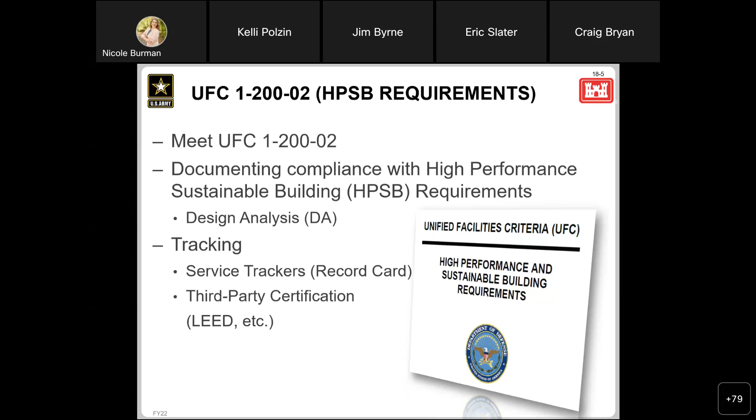So diving into the tracking process here in the UFC, it calls out the high performance sustainable building checklist to find the one that's appropriate for your project. You need to go to the whole building design guide, and that has those tracking requirements and reporting pieces.

So when we're diving in here, what we have highlighted right here is for the Army underneath the USACE sustainability tracking. Then there's the NAVFAC and the Air Force below that. What we're showing here is that energy and sustainability record card.

So that is all one and the same, to just make that clear. The high performance sustainable building checklist is the same as that E and S record card if you see those written in different places. So that's the intent.

Okay, so in reporting, best practice is to make sure that not only is the delivery team completing these checklists, from the very beginning, right, we're supposed to have these at charrette reports and so forth. So every deliverable, you would have this checklist. But also, best practice is to make sure your district sustainability POC is aware and receiving that same checklist to help with any lessons learned and upward reporting.

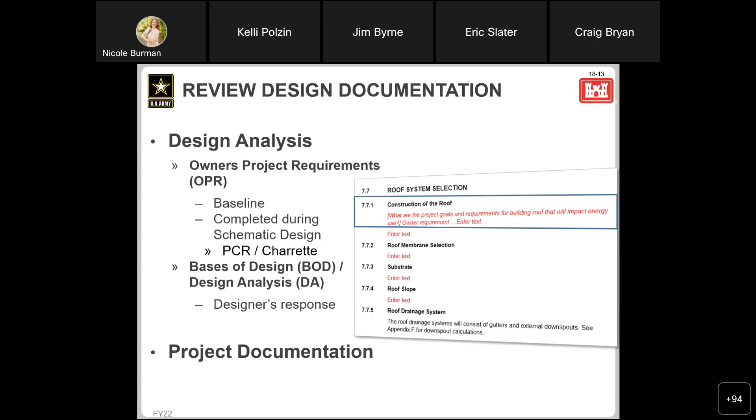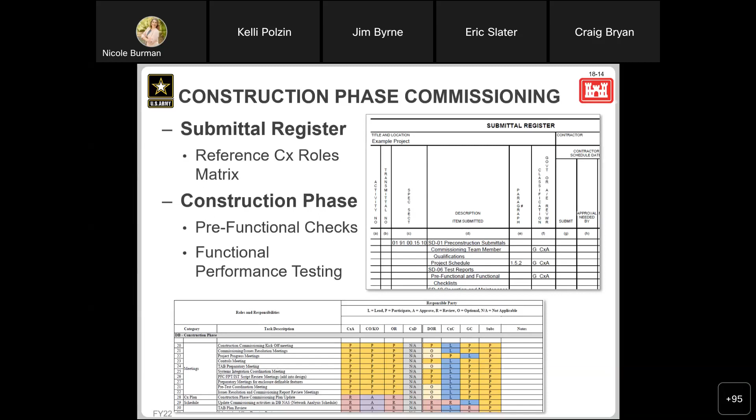All right, we're going to go ahead and move into third-party certification. So I'm going to be doing an overview of third-party certification and kind of where that lands and what that process looks like. And then we are going to touch on several pieces of credits, all tied back to the UFC specifically. But depending on time, we may not be able to touch on them for very long. Most of them have already been covered in other webinars, but we're talking about documentation here, so we have some information to provide for sure.

Okay, so diving into third-party certification, really it has a significant role in reducing energy and water, the taxpayers' money, contributions to national security, keeping indoor environmental quality going. It has been studied and shown that having somebody review—an outside entity, a third party—reviewing our high-performance buildings has saved taxpayer money in that sense, because before we had verification teams that had to verify some of this, and think of how many levels of employees that would be sitting in a room looking at all these pieces.

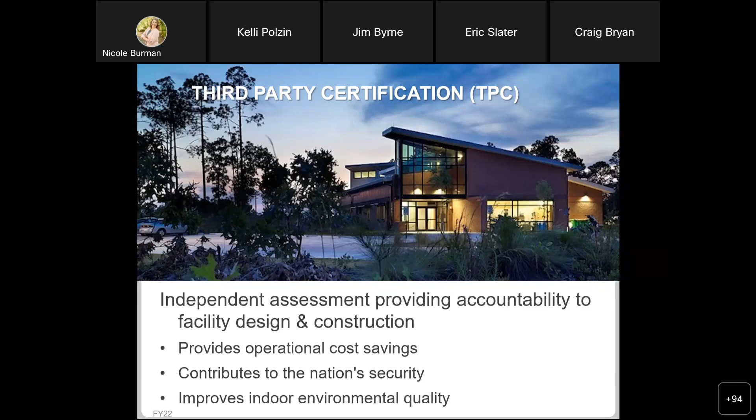So let's look at the options. Some of these are available to other services, and we've got two main third-party entities that work this: the Green Building Initiative, GBI, known for Green Globes, which also covers guiding principle compliance. If your agency is like Air Force, they would be one of your options for guiding principle compliance. Then we've got GBCI, the Green Business Certification Inc..

They are the lead, right? USGBC—their terminology really gets all flipped around when we talk about it, but this is a good visual to show where that breakdown is and how it moves into the language that's out there. So LEED is USGBC, and they're underneath that GBCI umbrella.

They also do a version of the guiding principles. So when we're talking about Army, we're looking at LEED. When we're talking about Air Force—and NAVFAC actually allows a lot more—but for the guiding principles, you have two options there.

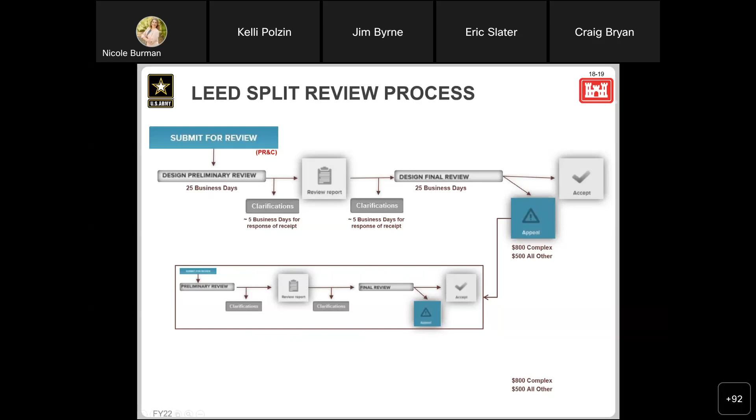In general, we want to remember that some forms have linked information, or that information will be verified by the reviewers, and they will send clarifications or request changes and adjustments if they don't match for some reason. So we want to make sure things like your numbers of employees — your FTEs or visitors, the male and female ratios, your LEED boundary, and so forth, which we'll talk about later — all of that should be matching throughout the project.

The blue fields in the form are fillable. Forms do expand, so when you first look at it, it may look really simple, but once you start picking your options it'll expand into what data you need to provide, and so forth.

LEED updates their supporting documentation, so you want to make sure that when you're starting that documentation, you're pulling down the most recent information — spreadsheets and so forth — from the credit library online.

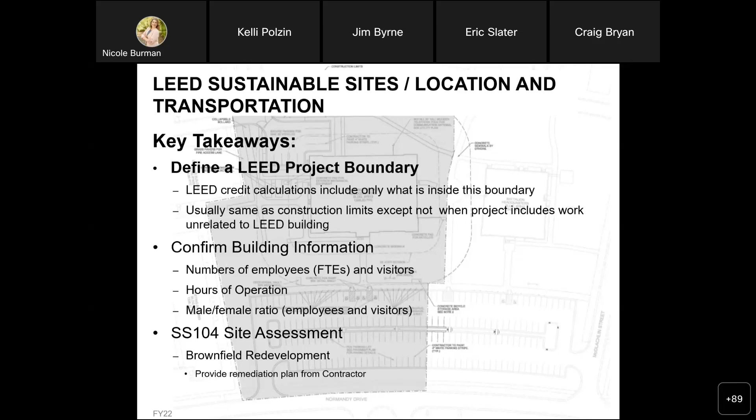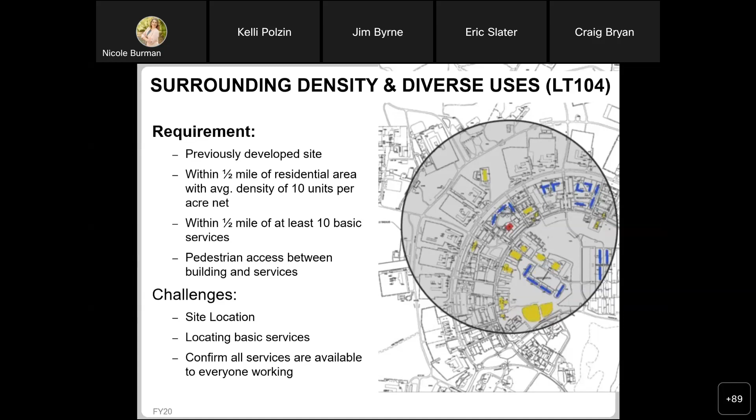Okay, so that hits our mark of all the things that haven't really been touched on in their webinars. Now we're moving into all the other key takeaways, key pieces that are related to our UFC.

Diving into water efficiency, this is bolded: calculate early. You want to make sure you have that male and female ratio waiver ready to go or already uploaded into your credits, waiting for that day to submit, but also work on this. This is something that can be done very early - it's a quick calculation. Once you understand a little bit about your project, you can confirm how close or how potentially not close you are, depending on what that mission is accomplishing for your water efficiency. This is related to that water efficiency product, and here's the EPA's WaterSense to reference and look at there.

Did have another question in the chat: what level of documentation is needed for projects that are not subject to third-party certification? Example being renovations that are less than 50% of replacement costs, where just a component of the building is being replaced - do we just fill out the high performance sustainable building tracking sheet?

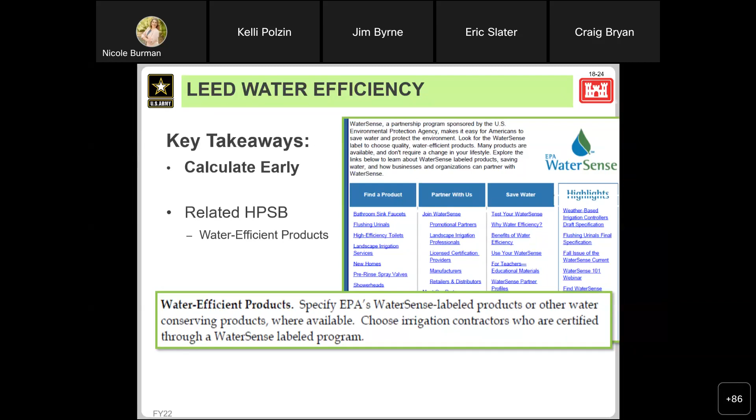Okay, so more water elements here. There's opportunities, there's always opportunities for innovative technology. Just trying to see when that's an appropriate time to pursue that and work that. If you've been around for a little while, you know the story about waterless urinals. That was not popular, and so Army no longer requires waterless urinals. So that may not be your best approach for the innovative wastewater technologies, but there's other ones that should be discussed and thought about when you're looking for opportunities here on your project.

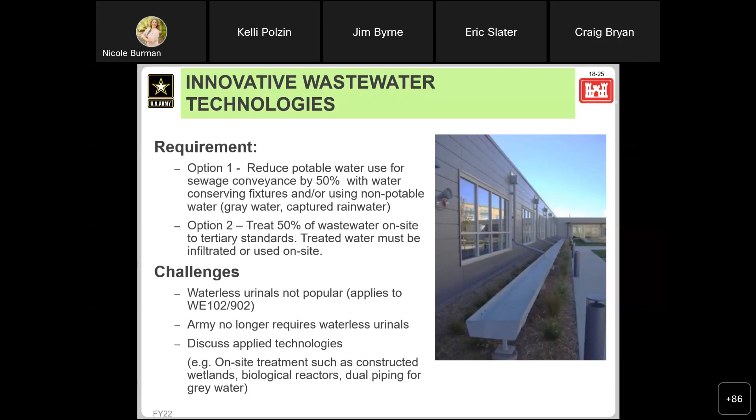In the water use reduction, this is the one where I'm talking about that calculation. You can dive into that pretty quickly. Of course, this is where that waiver gender ratio comes into play and will have to be uploaded. You can find that on the Whole Building Design Guide website. And then this is where you also can consider or understand what's not considered and what's included in that calculation. Sometimes we have confusion on which things would be a part of that and potentially make assumptions without doing those calculations and ruling a credit out prior to it actually being achieved.

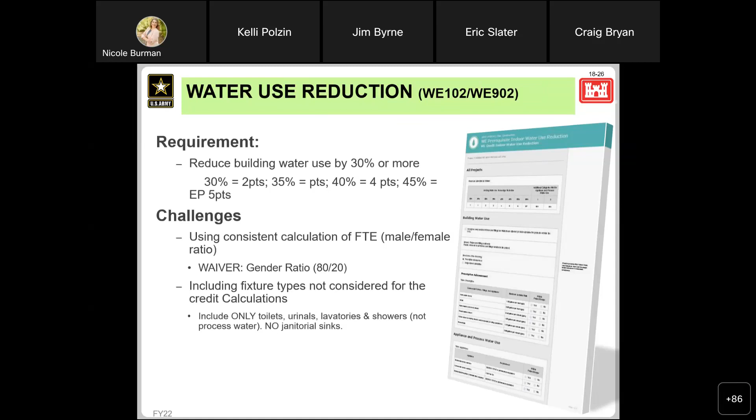Diving into the energy and atmosphere, fundamental and enhanced commissioning. So we've talked about this a lot today in those terms, but really we're looking to make sure you document things clearly and make sure that you have in your contract what you need to achieve these parameters. Fundamental should be fairly straightforward. There's less required by LEED for that. Specifically, it aligns with our requirements.

And then that enhanced, as we discussed before, we want to make sure that if you are pursuing that and your total building commissioning efforts really align closely with the enhanced commissioning, you want to double check those small nuances and rules in the credit specifically to make sure that you don't rule yourself out from meeting that credit.

Other things we have here is building metering. So this is also something to look into. I would say every project really should be looking into this and talking to your installation about it, but that does not necessarily mean that we're going to meet it on every project. So you want to make sure that you're looking at what those requirements are. I think this is where, as we talked about before, the measurement and verification part of it comes into play. There are some additional requirements in the credit that may or may not be a part of the building scope or be feasible for the installation.

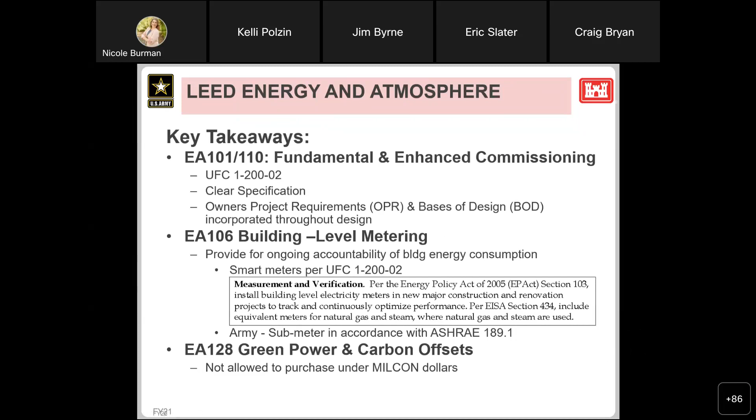And then green power and carbon offset, so that is specifically identified as not allowed to be purchased with MILCON dollars. So we understand our approach, or lack of ability to do that, for our credits there.

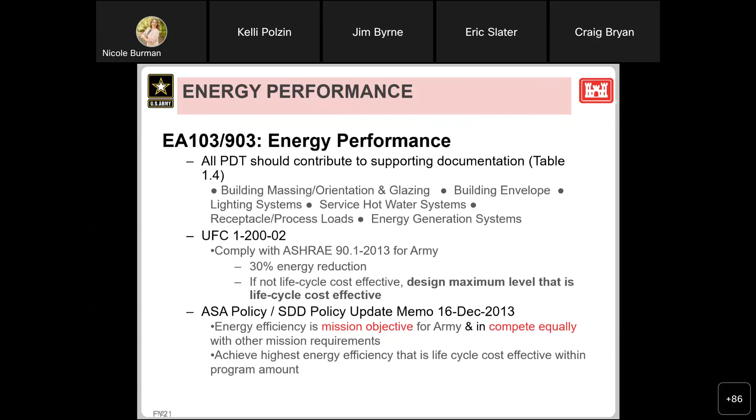Energy performance—so we've got 4 minutes left, I just want to make sure I'm understanding where we are. There's a lot of information here, this is a rabbit hole that we could go down. But in the end, we want to make sure when you're looking and documenting the credit that you're understanding both what's required by the UFC and policies, but then what's actually required for the credit itself. And I will actually say that this visual over here to me is a little bit more helpful in that sense.

Bottom line, you cannot assume that your project meeting the high performance sustainable building 30% reduction is going to equally meet LEED in terms of reduction and points. So 30% for high performance in our UFC does not equal 30% on LEED. They are calculating things slightly differently; one's based off cost, which changes things.

So really, I would go down to a handful of points as what I'm actually tracking, and then put several in maybe if you think you can really achieve it, so your teams aren't actively pursuing or looking for additional credits to meet LEED Silver because you've got potentially 5 points that aren't achievable, we just don't know it yet, built up into the energy credit itself. So we don't want to put all of our eggs in one basket.

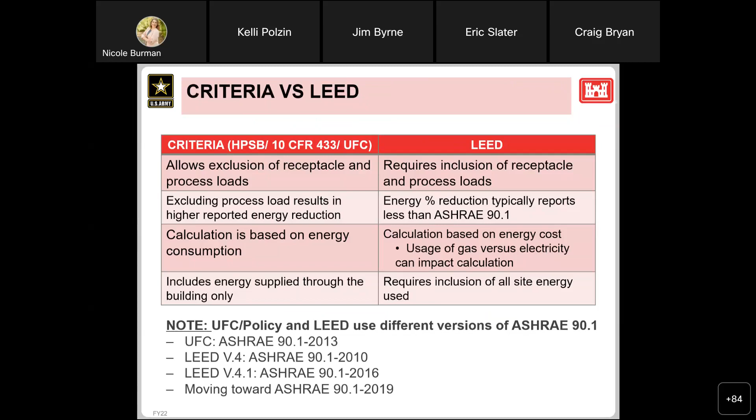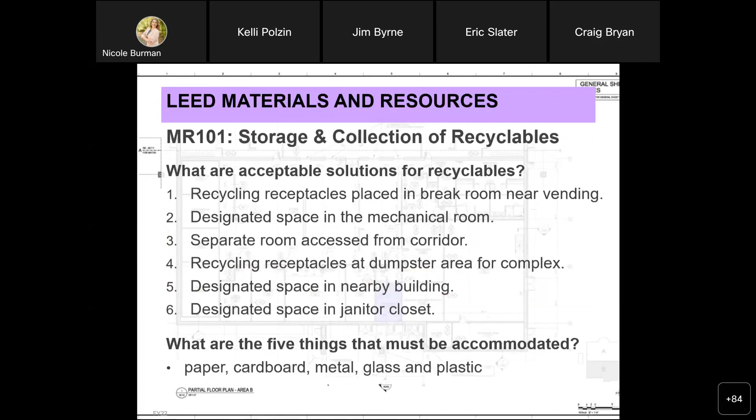I actually spoke last week about materials. This one's really focused on what we talked about last week, so I'm not going to go over it again this week. We've got a webinar online in our team that covers all of that. So we've got to keep in mind the storage collection requirements and what we're looking for in our products, making sure we're doing our construction demolition of 60%.

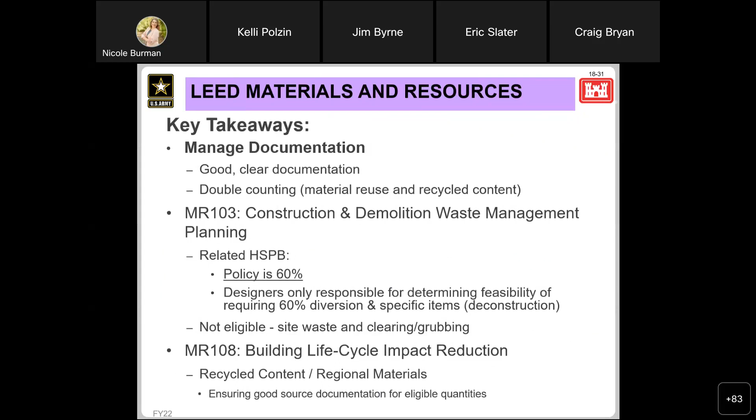All of this needs to be documented either by design, since it's a design credit, or by the contractor, and monitored in your e-notebook. That's the key notebook we should be looking at during construction to confirm how everything is going and what impact that has to LEED certification.

Take a look at your innovation options, pilot projects, and exemplary performance early. Make sure your zip code is right before you finish registering, because that dictates your regional priority credits. You are limited to 4, but they have more than 4 options, so pick which ones you'll be successful at.

With just 1 minute left, I wanted to touch on exemptions and waivers. We get questions about this. Bottom line is we've got a couple things happening: we've got a UFC and codes we need to comply with, and we also have Army sustainability policy.